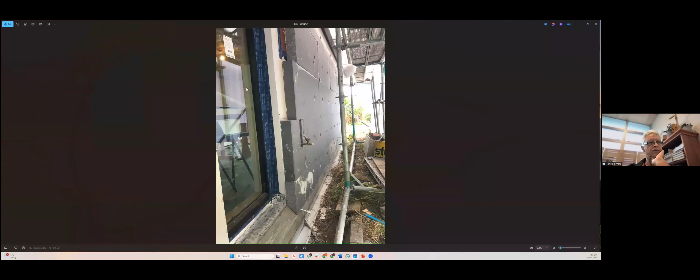So yeah, 16 years ago I was introduced to Passive House through different ways, but the main thing was I was surfing on the web and I was looking at different building options, and I found this system and I thought, yes, great, this is me. So we got stuck into it and went down that path and joined up with a group in New Zealand and worked with them for 10 years doing Passive House buildings.

Around the base of the building, because it was a concrete slab sitting on uninsulated exterior foundation work, Jason figured that we needed to insulate 600 mil down from the finished floor height of the inside of the building. So if we couldn't go down 600, we had to go down and out. So you'll see a little skirt of polystyrene protruding out around the base of the building.

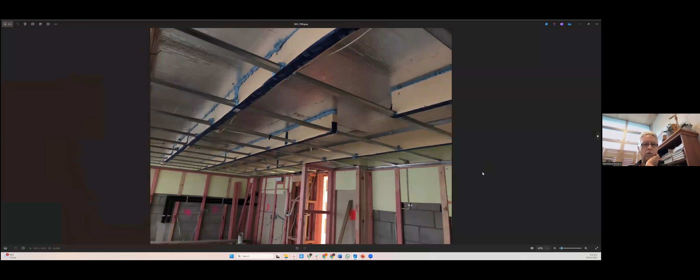So we dug down to the foundations all the way around the building, and laid in a layer of polystyrene, and then the plasterers fitted a base skirt with a 45-degree angle on it, which was a capillary stop. So any moisture that traveled up got to that capillary stop and couldn't move up behind the cladding system. So the cladding system sat on top of that 45-degree angle.

So that piece went around the building all the way around just to start with. And so that insulated the perimeter of the slab and insulated the exterior of the building.

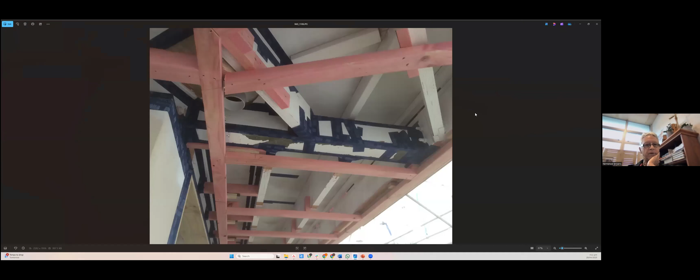Because this building had a timber roof, we had to airtight seal the timber structure to the wall blockwork. So Jason decided that because the exterior blockwork was plastered and painted, that was going to be the airtight layer for the walls, and the roof had torch-on membrane, and that was going to be the airtight seal for the roof.

So what we had to do was seal between the roof and the wall by means of taping. So where there were rafters that protruded out over the top plate out to the soffits, we had to put in plywood. We cut in plywood gussets, battened them all in, and then we taped around every joint. One of my guys was taping for 4 to 6 weeks.

And you'll see this particular beam that's protruding out from the building. This is a steel beam. You can see the flange at the end where it bolts to the outer perimeter board. This was ply wrapped and taped, and then it was polystyrene wrapped, so that we minimized the thermal bridging through the steel that continued onto the inside of the building.

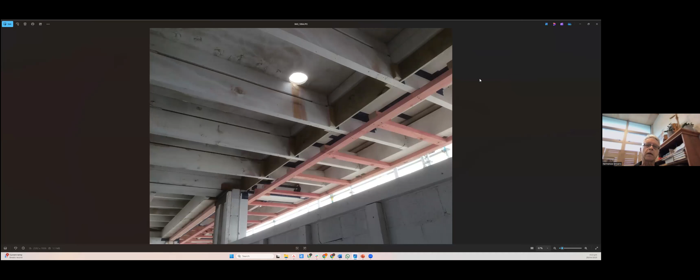Then because the roof had to be insulated as well, over the top of the existing torch-on membrane, we had to re-pitch the roof to 3 degrees, and then 2 layers of 80mm insulation board were laid over the top of the 3-degree pitch, and then new torch-on membrane was fitted to that.

So we basically had 100mm insulation on the walls right down to the foundations, 600mm down from finished floor height, and 160mm insulation over the existing roof. You'll see here these bits of plywood that are fitted between the rafters. This is where a window was sitting in this opening. So then we could tape down from the plywood onto the window when the window was fitted.

The insulation was layered in between all of these, so we had a continuous layer of insulation up to the insulation on the roof above the plywood.

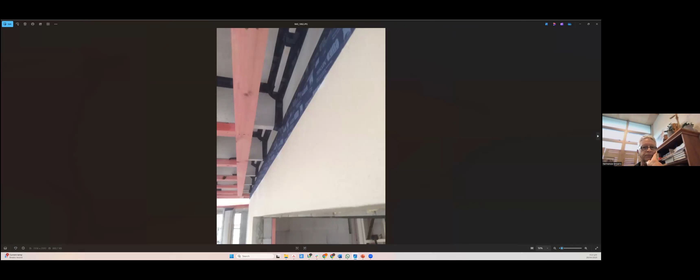What else have we got here? It just shows you all of the taping around the soffit areas.

One particular problem we had with this building was the second floor had protruding concrete decks, and we were developing the underside of those decks into new rooms, one of which was an existing room. So to mitigate thermal bridging from the exposed concrete on the outside of the building through to the new ceiling with the new room below it, 80mm insulation board was glued to the underside of the concrete deck.

Jason modeled that we needed to run 20mm insulation board down the walls from the ceiling wall junction down 600mm. So we did all of that, and then what we did was put a suspended ceiling in those areas.

With the ventilation system, the return air was channeled to go back through the lowered ceiling area. So to make sure the return air didn't make a direct line to the pickup point, we actually put baffles in the ceiling space, at about 1 meter centers.

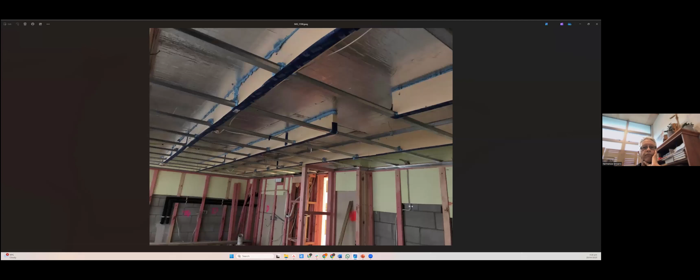So we've got the 80mm insulation board glued to the underside of the concrete above, and then we've got full-length baffles at meter centers. You can see quite clearly one baffle there that's got the gap in the middle. You probably can't see it that clearly, but at the end of the next baffle in front of it, there's a gap at each end.

So as the air flowed through that region, it had to dissipate through the whole ceiling space. The pickup point, you'll see the flow air ventilation in the back corner, just to the right-hand side - you'll see a little white square box there. The return air is just to the right of that, up inside the ceiling space, so the air actually had to dissipate right across to there.

A brilliant idea, and it worked really, really well. There were no problems with air flows. The other thing that we did with this building was the owner wanted to individualize each room.

So each bedroom door had a seal right around the door. So when you closed the door, a seal dropped down from the underside of the door. So basically the room was sealed off.

So we had flow and return lines to every room. Instead of having a flow to every room and a return from the bathroom or the toilet area or the kitchen, each room had two ducts. So in the plant room, which I haven't got a photograph of because it was too complicated, there was double the amount of ventilation pipes, and yeah, it was quite interesting in an existing building, getting all that ducting through the building.

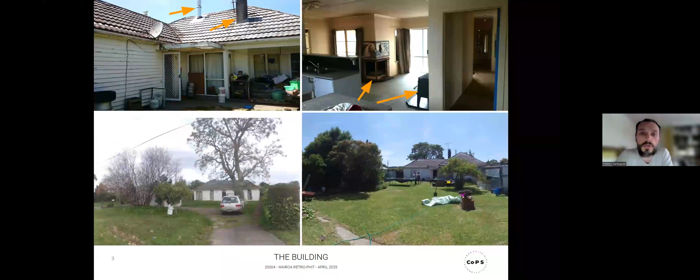So what we've been dealing with is still ongoing - a single detached house in Wairoa town. That's the view from the top. When we picked it up, that's what we found - very rundown. The house is from 1950, timber framed on some kind of concrete floor, single story, but with quite a lot of volume in the roof. And that's the roof volume.

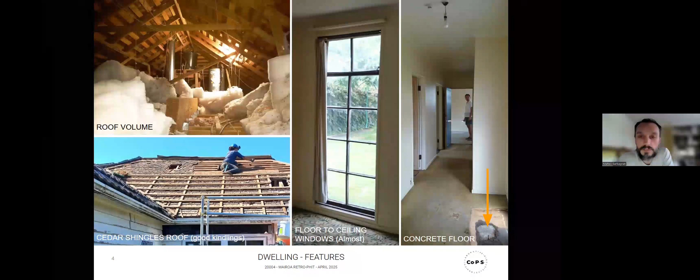So immediately we thought, well, we should use that volume to do something with it - make a double high space, mezzanine or something. There were other features, and the layout in general kind of suited us, so we thought with minimal changes we could make it work.

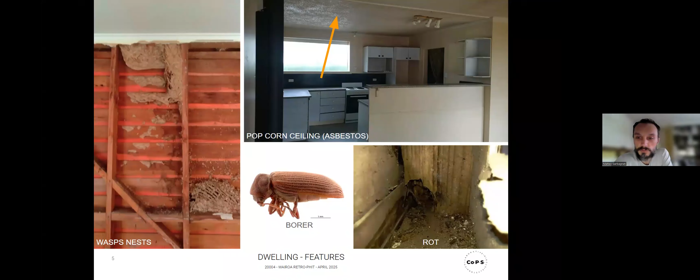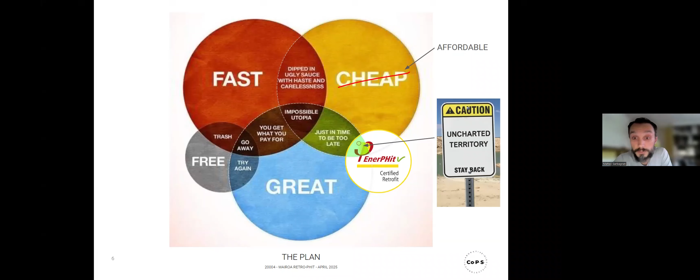And yeah, well, then there were the usual surprises when you get an old house - the usual bit of rot, a bit of borer here and there, some asbestos. But the other tricky thing for us was the budget. We wanted to do a good design, affordable, and we are in the little green zone, so even doing the EnerPHit certification can be a bit of a challenge.

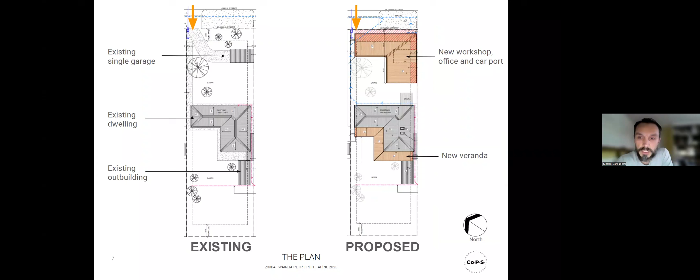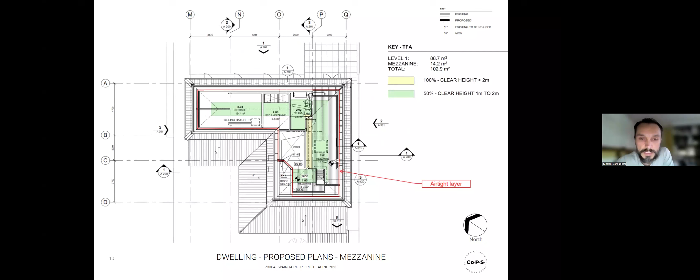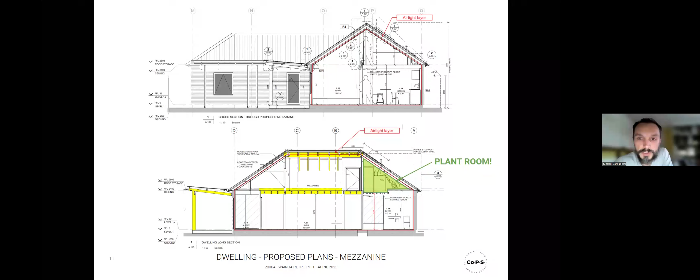So we basically reclaimed all the volume in the roof space - removed the ceiling in the living area, opened it up, put a mezzanine in, changed all the roof structure. Most of the space in the living area is open, so it's all kind of living space, and then in the lower part of the roof there's a bit of storage space, sort of an attic. And yeah, that's how it looks space-wise.

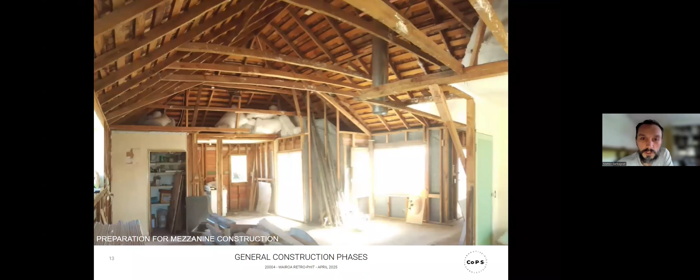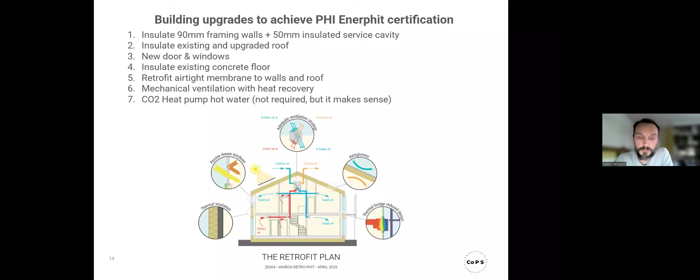In terms of the upgrades, we followed the well-known strategy of building a passive house and applied it to the retrofit. So we upgraded all the walls, all the roofs, new doors and windows. We insulated the floor, retrofitting insulation on top of it, and retrofitting the airtight membrane, and then mechanical ventilation with heat recovery, and a more efficient hot water system.

Wall construction, again borrowing from the knowledge of how to build a passive house, we insulated the existing cavity, 90 mil framing, thereabout, maybe 100, and then added a service cavity with the airtight membrane in between.

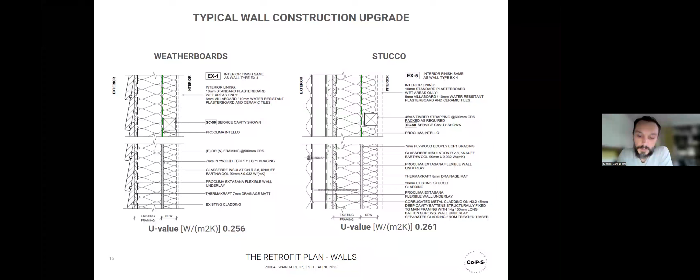We retrofitted two wall claddings: one is weatherboards, timber weatherboards, and one was stucco. On the stucco one, we also added a metal cladding in front with a ventilated drain cavity. Where we have the weatherboards, we also retrofitted a polypropylene mesh to create a bit of airspace, because otherwise it would just be the usual direct fix.

You see here, while this is in the process, the studs have been painstakingly removed one by one. In most areas I left the cladding on and removed a couple of studs at a time, replace and carry on, so the weatherboards didn't have to be touched or removed too much. Again, in order to preserve what we had and minimize the work, and also fitting with my work schedule—sometimes it was just a couple of hours a day—so I didn't want to have the house open completely on one side.

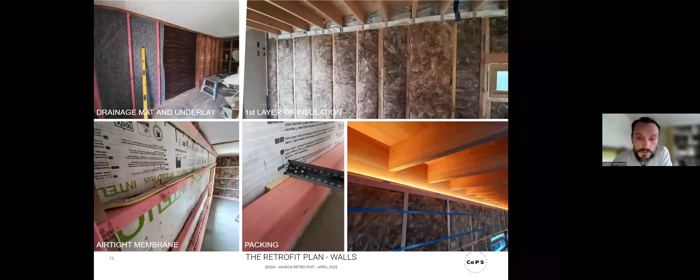Then, retrofitting, we used Intello for the airtight membrane, and that's the front of the building where we retrofitted. We added also a metal cladding.

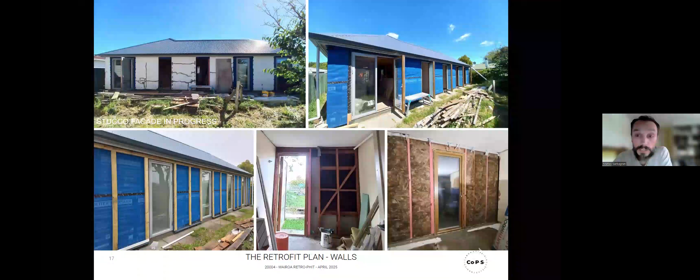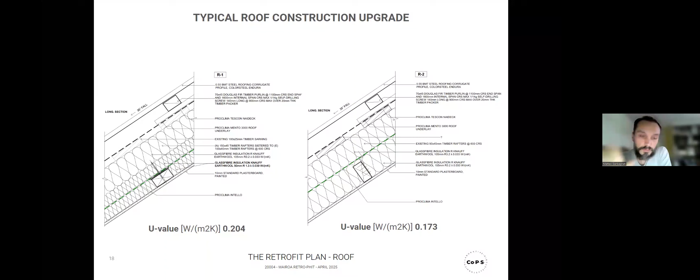For the roof, similarly, we changed all the insulation system, because before it was a flat ceiling with some insulation on top. We made it skillion, so insulation between the rafters, retrofitted airtight membrane, and then a service cavity. Different thicknesses, because one area had strengthened new rafters where we had the mezzanine. So we changed the rafters there, but in the rest of the roof we kept the original rafters. This is in the process.

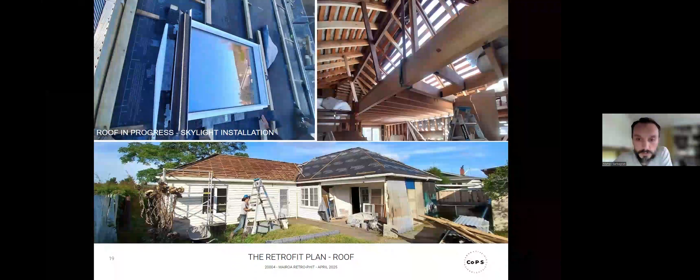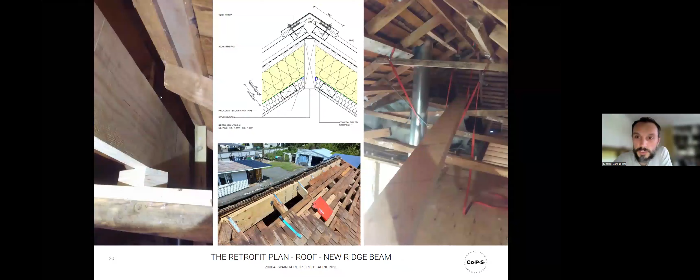Retrofitting the ridge beam was a bit of a challenge—probably nothing compared to what Terry had to do, but I found it quite interesting to think about: removing the existing ridge board and slotting in a new ridge beam. It was great to do it.

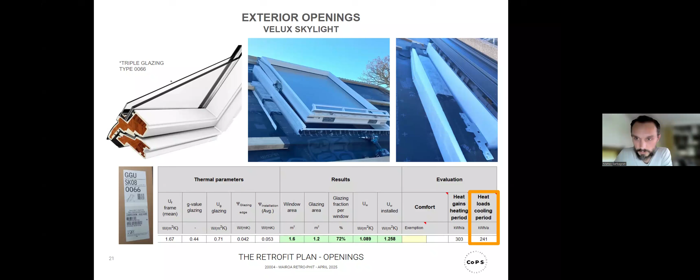In terms of exterior openings, we have one skylight, which adds a great addition for the mezzanine. It can create a bit of overheating in summer, but that's a trade-off. We managed to use a Velux triple glazed unit, and I know it's a bit tricky to make work in other climate zones, but in our climate zone you can still make it work if you pack all around the skylight with some kind of rigid insulation.

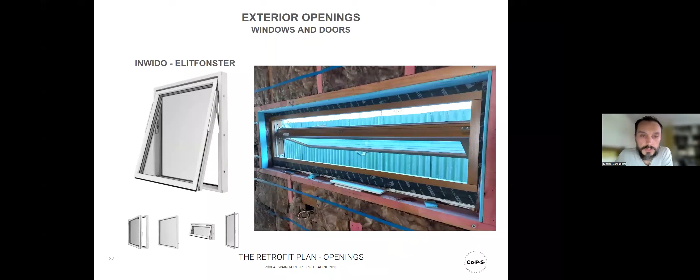For windows and doors, we used triple glazed timber with an aluminium skin outside, from Europe, as very often we have to. They're good windows—not probably top performance, but we're in a warm climate zone, so they work fine.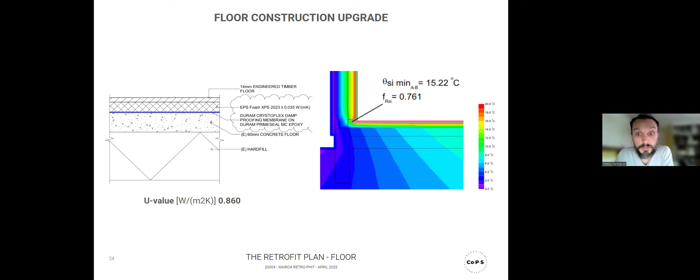For the floor, we have a concrete floor—not really a slab, just 60 to 70 mil thick, unreinforced. So we're going to add rigid insulation on top, EPS foam 30 mil, and then a floating engineered timber floor on top, again to keep the build-up thickness to a minimum. We chose this option instead of insulating outside because it would have been more challenging to insulate along the footing. I did modeling in THERM first, and the results with internal insulation were probably better, and it seemed a little easier to retrofit.

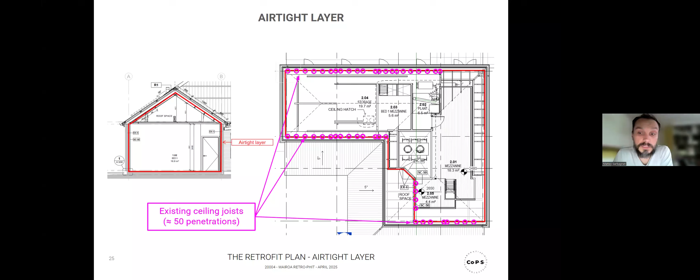For the airtight layer, I thought this was challenging, but after seeing Terry's job, this is almost a joke. Our challenge was retrofitting the membrane, the Intello, through all the existing ceiling joists—dealing with very tight spaces, but otherwise the task is just tape around it, and that's it.

So we did it in sections, going from the front, from the top first, then cut a 50 mil slot in the existing ceiling, and joined the Intello from the wall to the roof later on with the usual tape.

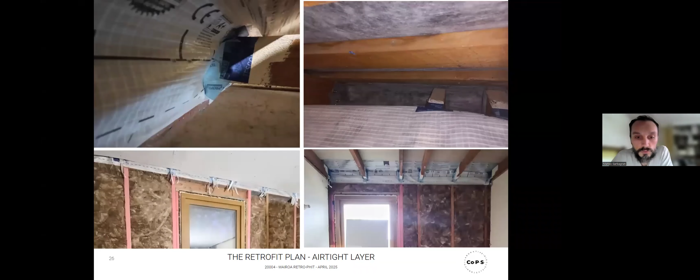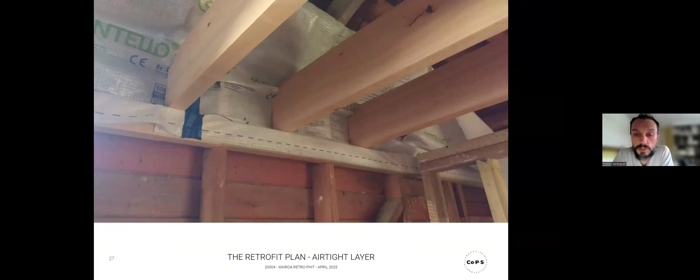I don't have a photo, but you can see here I also cut all the internal walls back another 50 mil from the external wall so I could fit the Intello continuously, to keep the membrane as continuous as possible. Where we have the new mezzanine joists, we put the Intello first, as per good construction for a new passive house.

Services, again, I'm pretty sure everybody is quite familiar with this. Nothing extraordinary, just sealing properly all the penetrations as best as possible.

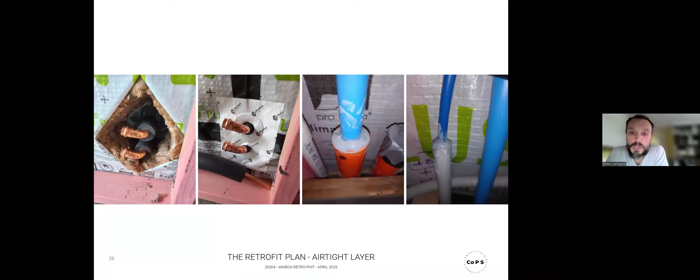We've done a quality assurance pressure test, and that was good. I was not expecting such a result. It's 0.45 air changes per hour, so it's great. Maybe we can even improve it, because after that I found a couple of areas where I didn't tape properly. But if we can keep that, it would be great.

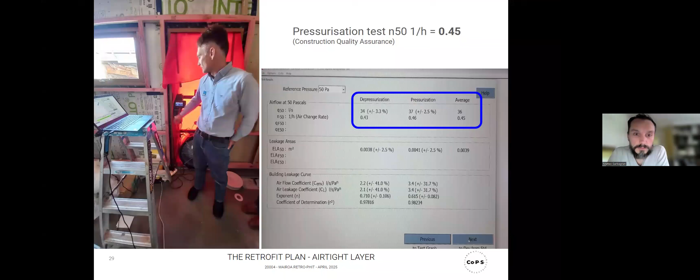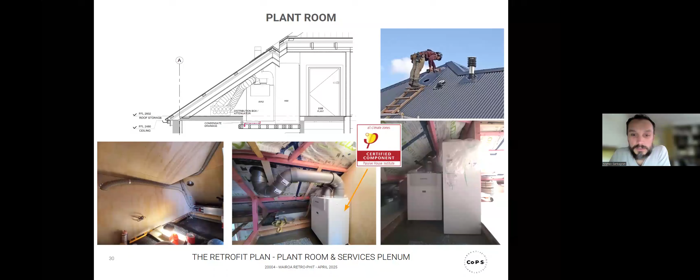And our services, we managed to reclaim some space in the roof space. This is extremely tight, but it works, and it's great to have it. What we've done here, in order to fit both the mechanical ventilation unit and the hot water storage, is lower the ceiling and make it all waterproof with a membrane. So basically it's all like a large drip tray, and there is an outlet that discharges on top of the bathtub, so if it leaks, it goes straight into the bathtub and you can see it.

Mechanical, well, services with all that tight space between mezzanine and ceiling and roof - we had plenty of space to fit all the services, which was very useful.

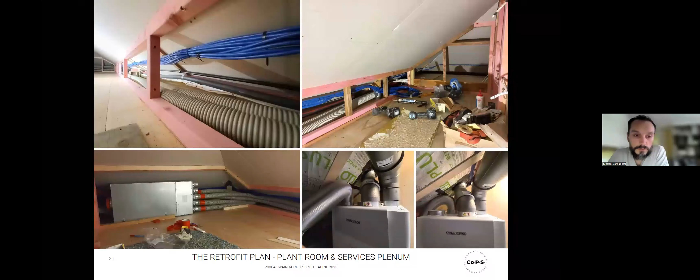And we have some space heating, and we opted to use this EcoDan, the Mitsubishi EcoDan system that can do both hot water and space heating. We have two radiators - a heated towel rail in the bathroom, and another vertical radiator like this. Total heating demand was 1.2 kilowatt, as far as I remember, so relatively low.

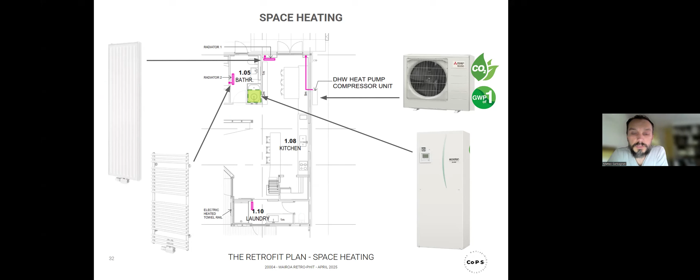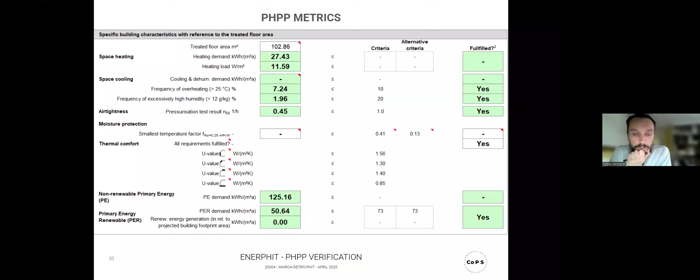And PHPP metrics, we're doing an EnerPHit by component. So the heating demand is not really there - there's no minimum to meet. It's more these other component characteristics, these values, that you need to meet or stay below the minimum. And even in this climate zone, even if you use triple glazed timber framed windows and doors, it's still pretty tight to satisfy the standard.

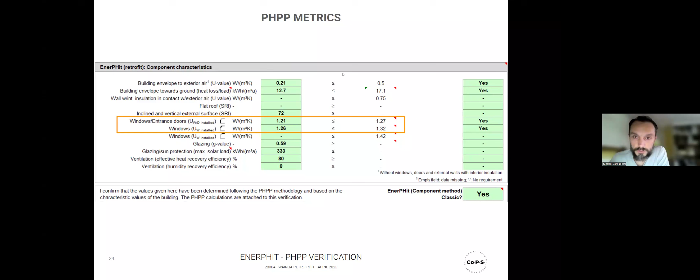Other than that, walls, roof, it's much easier. So just retrofitting insulation and doing the well-known construction for a passive house, you stay well below the minimum requirement.

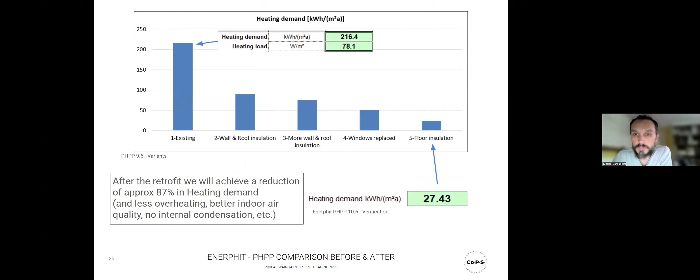Overall, the existing house would have been using 216 kilowatt hours per square meter per annum, and the retrofitted finished house is down at 27, so it's about 90% less. But we know it means also not just very low energy, but also a much more comfortable general house - drier, nicer, more healthy spaces in general.

So, Parka Wrap - what is Parka Wrap? What is a parka, first of all? A parka is an Inuit word for a jacket, which is actually an insulated jacket. I think typically in New Zealand we've often referred to a parka as just a shell, but it's actually insulated. There's lots of similarities with what I'm going to describe, with how we build, how we should be building, and how we could renovate.

So typically our walls look like this on the left - timber weatherboard to the left-hand side. They have no insulation in the walls, and they have plasterboard lining to the inside, single glazed windows. That's our walls. That's around about 720,000 walls in rented buildings that look like that.

We can also work out - not my data, this is easily found, Beacon Pathways work, MBIE's work - there are about 1.5 million homes in New Zealand out of about 1.9 million that have no insulation in the walls. So we should do something about that, right?

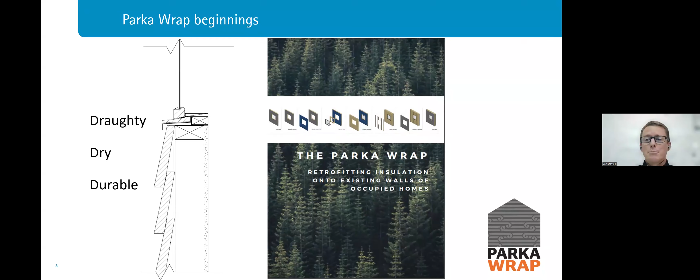That was the target of my research - it was a Master of Architecture research. It turned into something a little bit bigger than I anticipated as we went through it. So what is Parka Wrap? Parka Wrap is this idea that we can leave the occupants of the building inside the building and work on the outside from the outside.

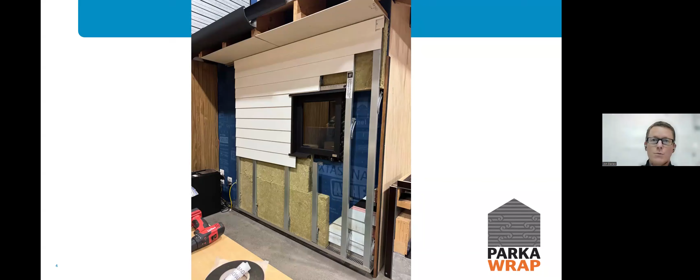Then the next part of this QA piece is put the rock wool on the wall. Is all of the blue covered up? If all of the blue layer is not covered up, you haven't finished yet. That's the level of continuity we can create across the wall with the rock wool.

Which is still quite typical, unfortunately, of a lot of homes that are owner occupied. There are hundreds of thousands of homes that have no insulation anywhere. That 720,000 number I used before - it's either that or 830,000 depending on who you talk to and what data you're looking at. So that's a completely uninsulated home in Rotorua, and that number in kilowatt hours is 486.

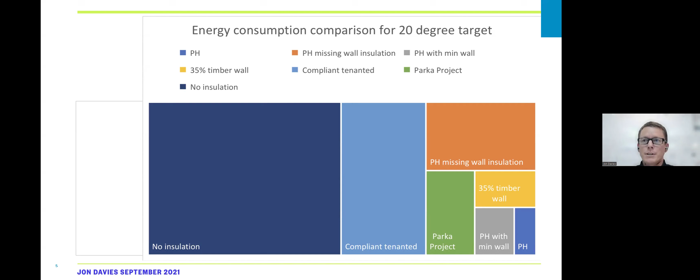And it was always aimed at social housing. So just going back a step now - during the research, I was actually the lab manager at this test facility in Avondale. I had access to the test booth that we were building. I built a replica 1940s wall.

Weatherboards work really well, but they leak. And if we think back to that first image of that uninsulated timber wall - weatherboards can leak, but they dry out, they drain and dry out quite quickly. If you stuff the walls full of insulation, you slow down that drying process.

That's why, in Matteo's presentation, that black mesh he talked about against the weatherboard becomes really important, with a weather tightness layer in behind that. That provides drying and it provides drainage back out away from the building.

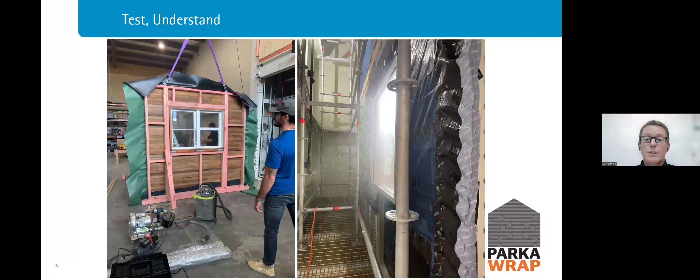From the research, we realized it wasn't just about social housing, it was a whole lot bigger than that. So a business partner and I started a little business to create the components. We don't own Rockwool, we don't own Pro Clima products, we use Starke windows for our projects, the UPVC windows.

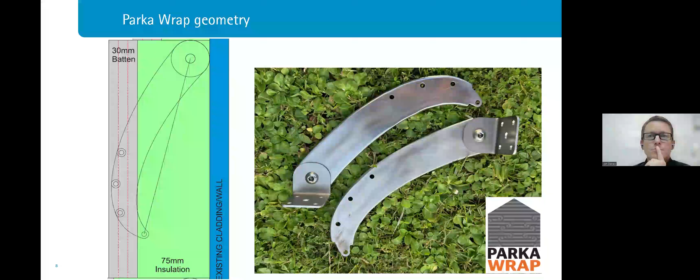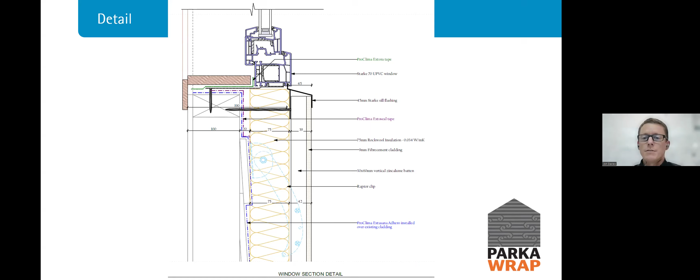You think, well, how does it stay up? That's a good question, I'll show you in a second. But just before we go on, the banana bracket there is sitting on the angle of the weatherboard. It could be sitting right back against the frame if the weatherboard had been removed, but it's sitting on the angle. It could be applied to a block wall too. We've put it onto a fibre cement weatherboard project so far, and we've got a stucco wall project coming up, which is my own house. So lots of different options and flexibility in the depth of insulation.

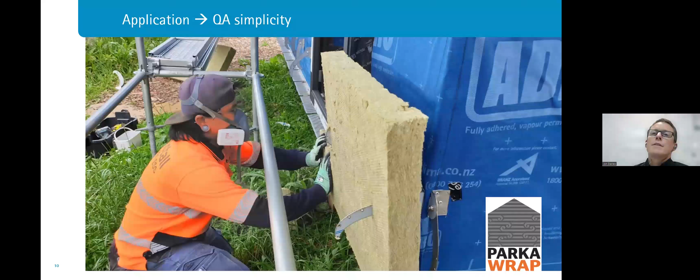So that detail in action, kind of — you can't see the base of the window, but this is with the banana brackets. They get put onto the wall, connected to the framing, and then the rock wool is pushed over the top of those and mostly pinned down with the vertical battens.

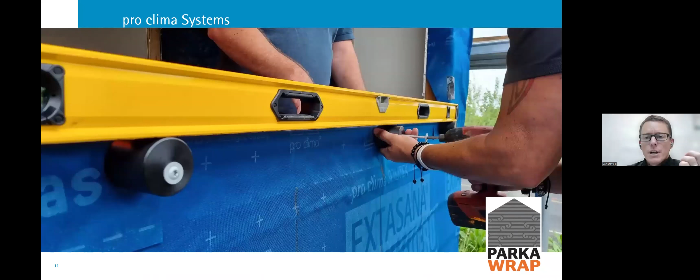This is another little invention, pretty happy with this one. I think it's going to be the most lucrative part of what we've created, but these look a little different now because they've actually been put into production rather than just cut out of blocks of acetal Delrin. That window cam, the one on the left, they all have an offset fixing point through that cylinder, which means you fix one to the frame and roll it for the height you want, then get your next one and roll that for the height with a level across. So you can imagine that gives you the ability to level up your window.

Those get locked off — there's another little grub screw which pins that now. And I do think that's Joe Lythe's arm there on the right, you better confirm that maybe in the Q&A. So that is the position now of the window sitting on those window cams — that blue rectangle there is the window cam. It's not a solid bracket all the way through.

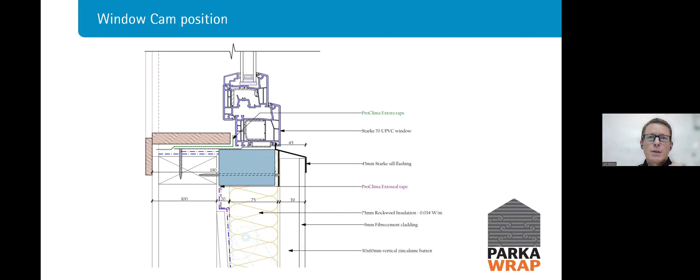Again, Starke windows work really well — yes, the data is there for Passive House, dropping that into the Passive House planning package as well. It's not unusual, it's now sort of common practice, pretty much the way you would typically use outright continuous insulation. And it's 5 o'clock.

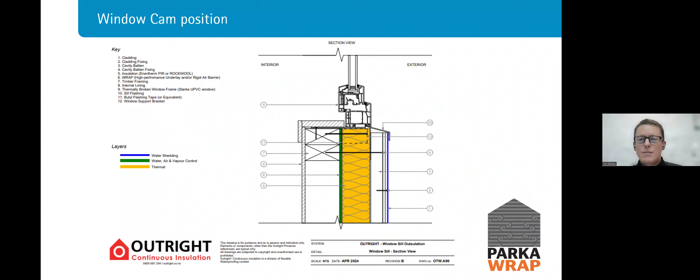We should stop there, eh? Okay, I'll race through because I've only got a couple of slides left, I think. Only 18 slides left, that's a little joke. You can have 2. Okay, cool. 2 slides, 2 minutes, let me go fast.

All of the work that we have done, the banana brackets, the window cams that are on the screen here, they've all been engineered. We know what it will cope with. We're looking at a maximum of 25 kilograms per square meter of cladding weight. The window cams themselves are plenty enough. If they can cope with my massive bulk, with me standing on that, they can cope with a window. You put more on if you need more.

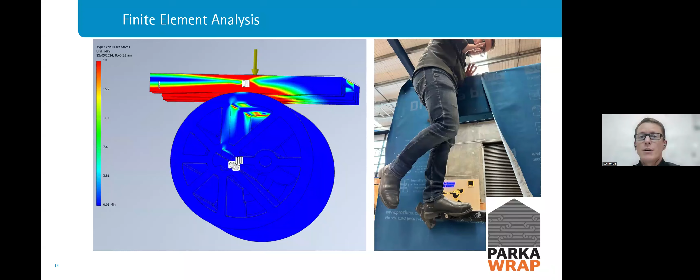The engineering has been done by Oculus Architectural Engineering. The testing that we did was at Shelby Wright Test Labs. This is now after I left Oculus and Shelby Wright, where I was the lab manager, so it's all legit. We destroyed brackets. We actually broke the rig and the plates that were holding the sample into the rig before we broke the bracket. So that one broke the rig at 770 kilograms of pull force. So we know it's robust, we know we've got a reasonably good system.

So going back to the house that Joe designed, Joe turned up to this building. It's at the ARA Education Charitable Trust at Mangere on airport land there. Students come in, work on the buildings. Students didn't work on this building, we had slightly higher skill level used for this one, but not German master carpenter level.

I think that's about it. That was my 2 minutes, and it's now 5:03. I'll stop.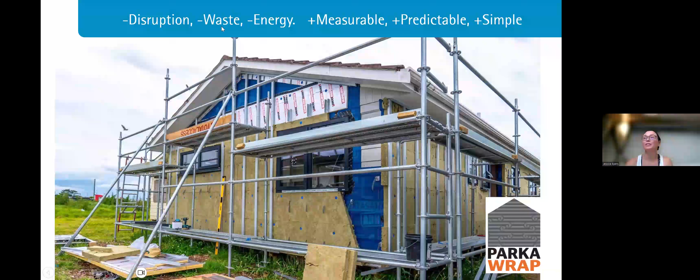Richard says, what options for connection of Parka Wrap to ceiling roof insulation? Great question, I should have just pulled up the detail. I've probably got that detail in the presentation. No, I don't, that's a great question.

So what we did with this project is, like other projects, we deliberately chose out of 5 houses one that had a concrete tile roof. So we were able to push concrete tiles out of the way at that soffit area and work from the top. Going back a little step, there was no asbestos in this building. It was an ex-Kāinga Ora home. When that was gifted to the charitable trust, it was checked for asbestos, no asbestos, but we treated the soffit as if it was, which meant that we didn't want to touch it. We didn't need to touch it, and so we pincered, if you like, the blue layer and the insulation layer around the soffit line. So that blue and that insulation then rolls up over the top plate and connects into the insulation in the ceiling. And I'm deliberately saying not the airtightness layer. The plasterboard on the inside of that building on the ceiling is technically the airtightness layer. It's not an awesome airtightness layer, but our work was at the outside on the vertical portion of the wall.

So I guess the consequence of using plasterboard as our airtightness layer - okay, let me explain that.

So the right-hand side is outside, with concrete tiles at the top right-hand corner. The blue layer coming up the wall is the adhero, and it doesn't perfectly follow the weatherboards. It doesn't need to - that's a peel and stick layer on the wall, which is then taped off, or could use a bead of Orcon glue to connect positively to the soffit. Then the green line above is the continuity of the airtight layer.

I said we pincered with adhero - we didn't. We actually used the spray-on Visconn product from pro clima to get into that space, which was dirty and dusty. Instead of cleaning all of that out, we basically just glued a bit of that dirt and dust. We took away the insulation - all of it was removed - so we sprayed into that space where the green layer is before the insulation went back on.

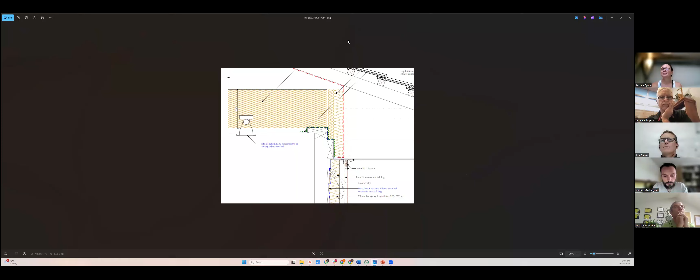What do you think, Joe? Is that enough info? That'll do.

Just a last comment on that - we used the strandboard floor, which wasn't in awesome condition, and the plasterboard ceiling as the top and bottom continuity of our airtightness layer. The walls were great, airtight, and that blue layer connected to the windows is easy to seal together. But the floor and ceiling weren't great, so we probably just have to acknowledge that this isn't going to be incredibly airtight as a building, unless a lot more work is done top and bottom - going back to what Terry showed us, that's the level of detail. If you're trying to get to EnerPHit, you'd be treating that a little bit differently.

Cool, okay, let's get through some of these. Joe asks Matteo: did you consider PIR on the floor rather than XPS? And did you consider external insulation rather than working from the interior?

Yeah, well, we are using XPS on the floor. I did consider PIR initially - that was my first option. We went for XPS because it offers more compressive strength, about maybe 3 times that of PIR, thereabouts, and cost-wise was also on the more affordable side. So yeah, we went with that.